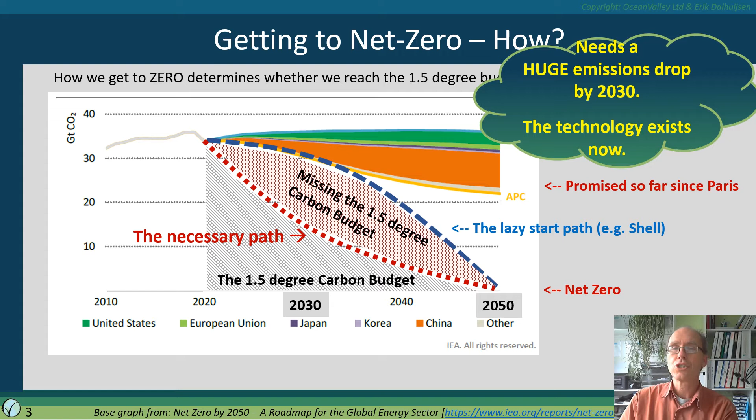On to the role of hydrogen. Hydrogen is an abundant element, a building block of water and the smallest, lightest atom in the universe. As a gas, it's not so abundant, and it does not turn to liquid until 250 degrees C below zero.

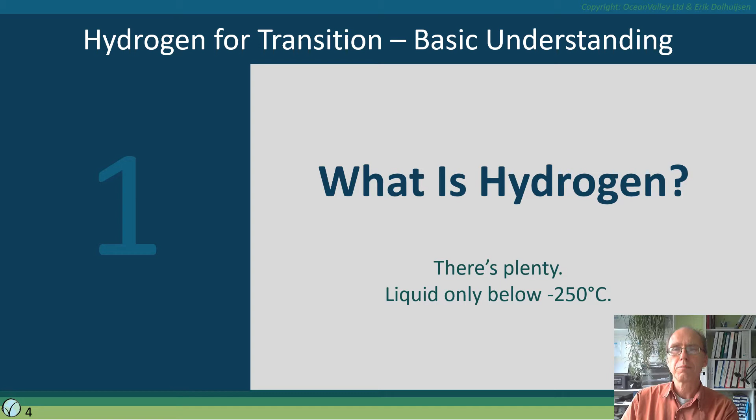In the context of net zero emissions and climate change response, hydrogen is an energy carrier, and only an energy carrier. It's only as clean as the energy you use to make it. It's clean to get energy out, whether by burning or with a fuel cell as electricity.

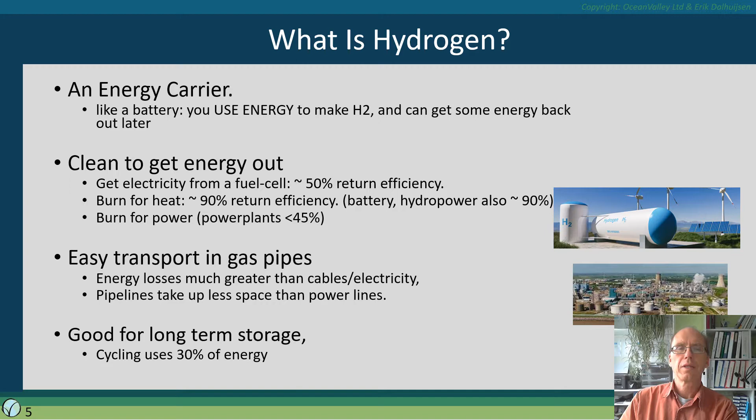It's easy to transport in gas pipelines, though this costs rather more energy than moving electricity. But the pipelines are smaller than equivalent power cables. And hydrogen is great for long-term storage, if you have a place for it. Cycling it into and out of a storage place costs about 30% of its energy content. Once again, it's only as clean as the energy used to make it.

The hydrogen economy is a term often used and is a misnomer. I quote the IEA's head of energy technology, Timur Gül: 'I think if you're aiming towards net zero emissions, you don't look for building a hydrogen economy. You look for a decarbonized energy sector.'

A little about efficiency, a subject often touched upon. For transport, in the future renewable energy world, a hydrogen car has 1/3 of the energy efficiency of an electric one. A synthetic fuel car about half of that again, so 1/6 of an electric battery vehicle.

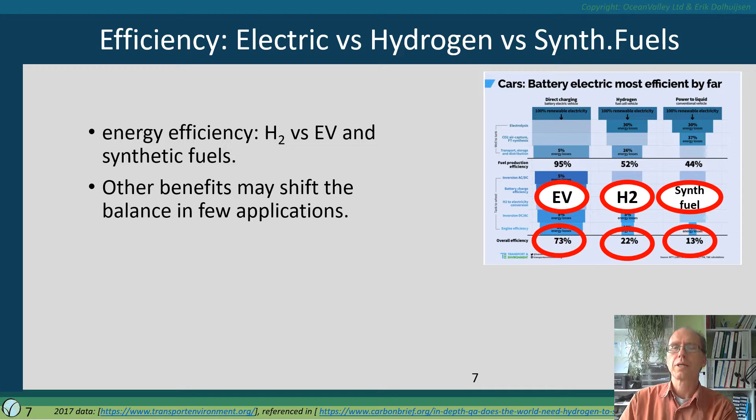For heating, even though hydrogen has great burning efficiency, it should of course not be compared with gas, but with the proper net zero alternative, an electric heat pump, which is 2.5 times more efficient than hydrogen.

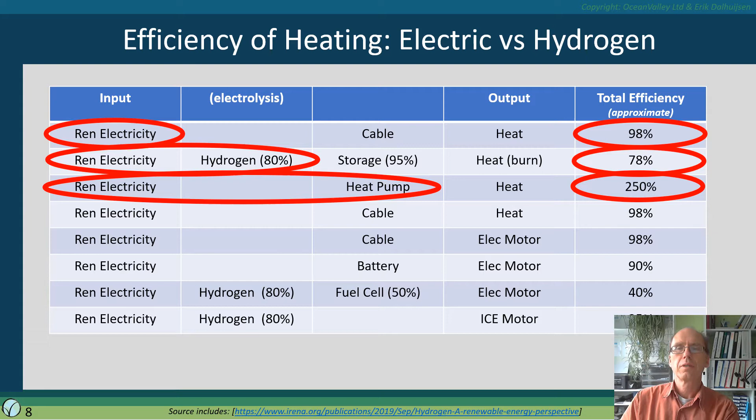So how much hydrogen are we using now? At the moment, globally, hydrogen uses 2% of the world's primary energy supply and 6% of the world's natural gas, and would use 8% if coal were replaced. This is before we start doing all sorts of nice new green things with hydrogen.

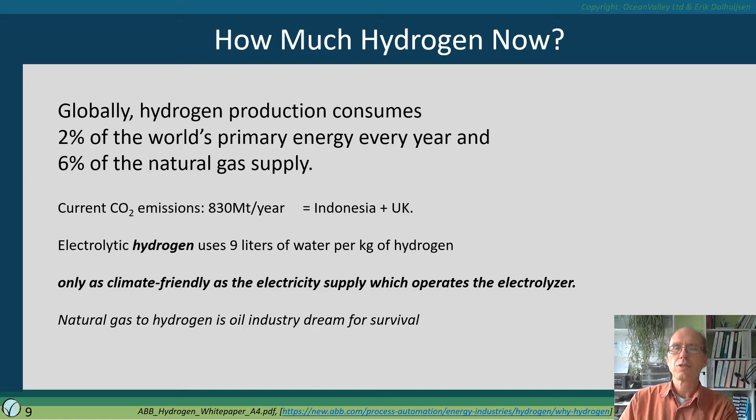At the moment, almost all hydrogen is made with fossil fuels, but there are better ways. There's only one hydrogen gas, but depending on how we got this gas, so what type of energy and what emissions were required to get the hydrogen, we differentiate types of hydrogen, each one named with a color. Many colors are used differently by different people, but we'll look at the main three, beginning with green.

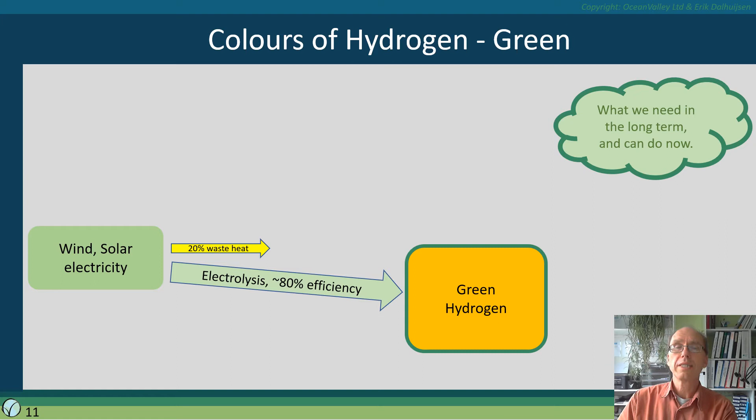Green hydrogen is made with renewable energy through a process called electrolysis, which is about 80% efficient, and there are no emissions produced from this process. Green is what everyone agrees we will need in the end, because it's the only sustainable variety.

Brown or grey hydrogen is made from oil or natural gas, usually by a steam reforming process during which CO2 is emitted to the atmosphere in the same amounts as if you were burning oil and gas.

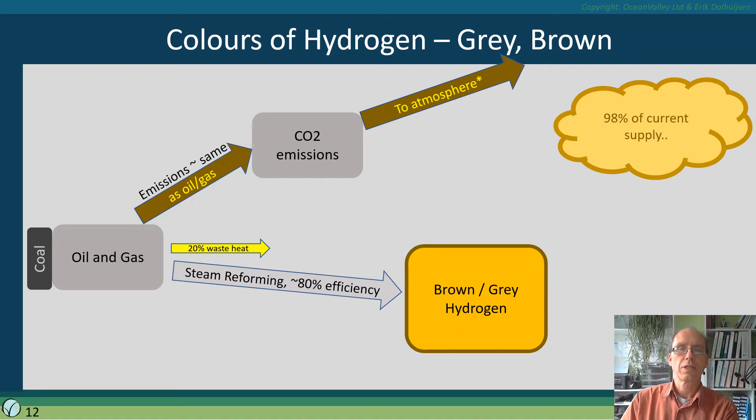So for the same energy content, grey hydrogen emits 20% more CO2 than natural gas. And if made from coal, these emissions are much greater still.

For blue hydrogen, we take brown hydrogen or grey hydrogen and then try to do something better with the CO2 emissions from this process rather than just letting them fly. We call this somewhat experimental process CCS or CCUS, carbon capture and storage. If it works well, it captures around 80% of the total emissions from the process. This captured CO2 is then stored underground, where we hope it stays for 10,000 years, because that's roughly how long it takes to mineralize and become harmless.

For now, two points to remember are: blue hydrogen is not net zero, and it's not a proven effective process anywhere near the required scale.

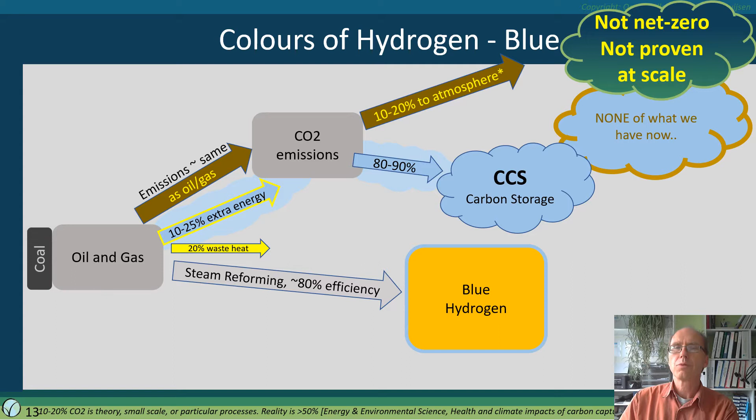Cost and price. We'll look at the comparable cost of hydrogen. The price of hydrogen will be determined by carbon pricing in the end. Considering there is no real blue hydrogen and still very little green hydrogen, this would seem a difficult question. Surprisingly, those in the know and in the business all seem to agree. Any concern about the cost of green hydrogen comes from misinformation and industry bias, not from analysis and understanding.

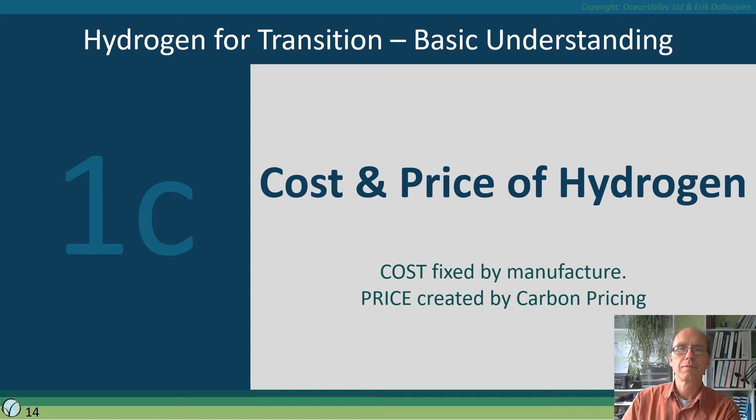The best estimate from IRENA, the well-respected renewable energy agency, is that by 2030 the cost of green hydrogen will be the same as or lower than the cost of grey and blue hydrogen, looking for example at Scottish wind power for production. Some of the big industries have explicit targets to make this cost parity happen. So already by 2030, green hydrogen will be the cheapest hydrogen around.

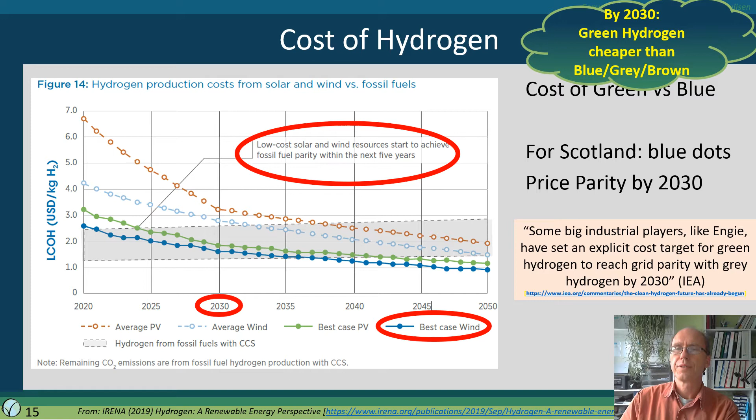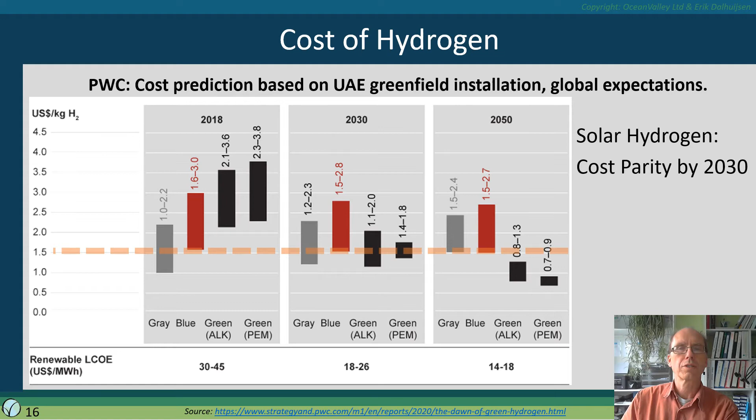A different take from PricewaterhouseCoopers, based on solar generation on the Arabian Peninsula in the UAE, also shows price parity by 2030 and an even lower cost by 2050. There are other cost pictures which imply a different story, the ones I've seen typically based on inadequate representation.

Hydrogen has one particularly important role to play in the new world of renewable energy, and I'll quickly explain why this is important.

Renewable energy systems are intermittent. They produce energy, mainly electricity, when sun, wind, waves, tides are around, but not at other times. This leads to a mismatch between energy supply and energy demand. For short-term daily cycles, there are multiple solutions, but for the long-term seasonal mismatch, hydrogen storage can play a big and important role.

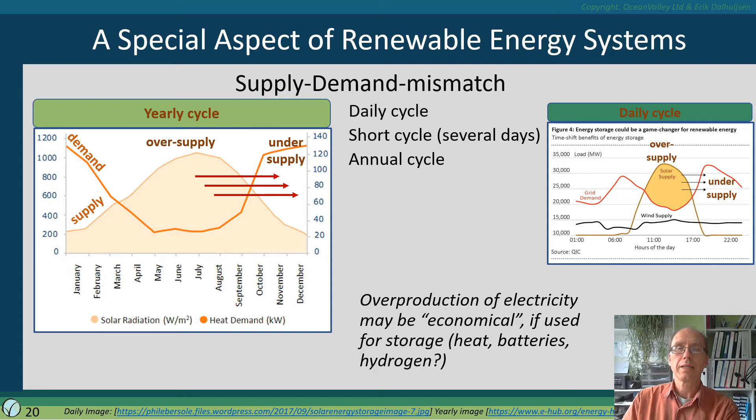Let's have a look at what the main uses and potential uses of hydrogen are. Currently, hydrogen is used mainly for industrial needs. Where it is used depends mainly on availability of storage and is typically used and turned into other products near where it's made. This means that where we choose to use hydrogen for the transition, it'll almost all be in addition to the current use.

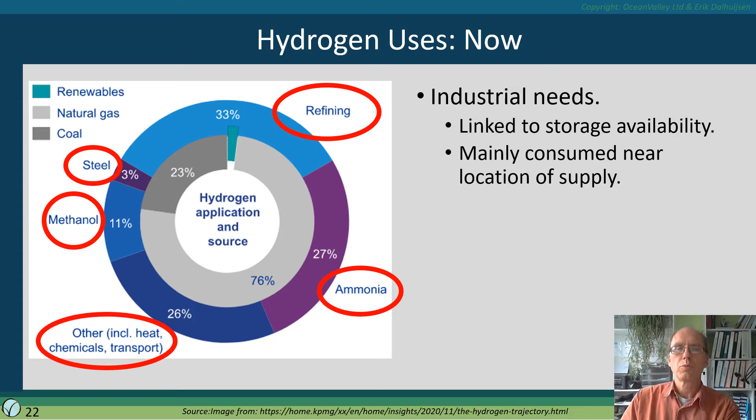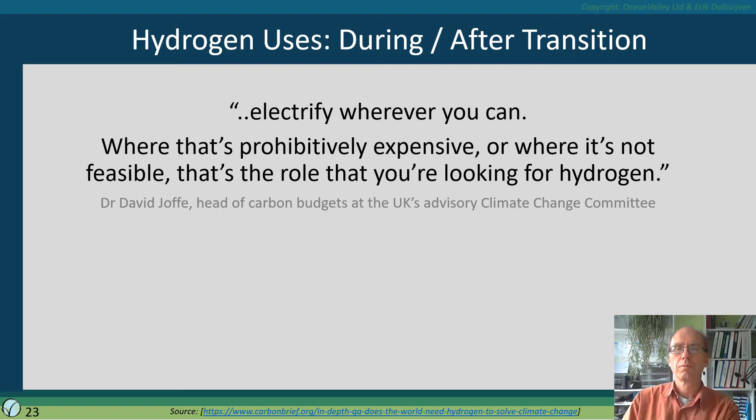And because we already need a lot of renewable power, this leads to the most important rule, and one on which there is general agreement. This is the need to electrify wherever possible. Only where that is prohibitively expensive or not feasible should hydrogen play a role. And of course, we need to reduce our energy need first.

During and after the transition, these are six of the important areas of potential use being discussed. Seasonal storage? Yes, this is an important role for hydrogen to play. It could well be that storage in old natural gas fields is a way to go. Renewable energy grid stability? Yes, by both using excess energy when the sun shines and the wind blows to make hydrogen and store it, and by turning hydrogen back into power when there's no sun or no wind.

Industrial application, where electricity is insufficient? Yes, though more and more technologies are around which allow direct electricity to be used in industrial processes. Industrial chemicals? Yes, for some products like ammonia this will be required. In areas like plastics, maybe revisiting the real need could also prove to be a powerful tool.

Transport? For shipping, green hydrogen as well as ammonia or methanol derived from it are likely fuels of the future. For road and rail transport, the applications for hydrogen are specific and limited, as I discuss in the next section.

Heating? Unlikely. Even though burning hydrogen in domestic boilers is being suggested as an easy drop-in solution, it's highly inefficient when compared not with gas but with alternatives such as electric heat pumps on renewable energy. Burning hydrogen, other than as a niche solution, can slow down or even derail a timely transition.

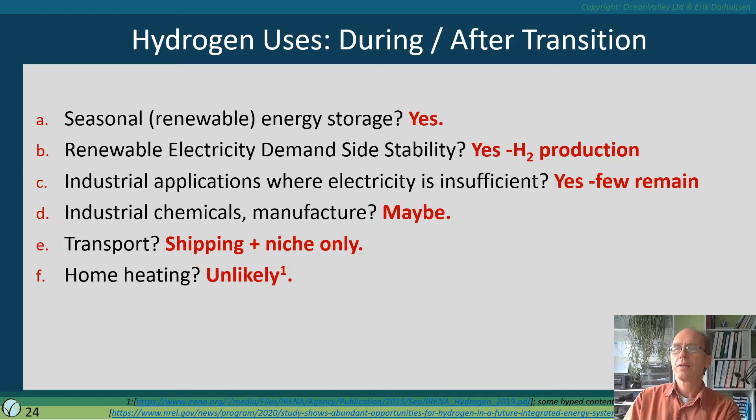There is unnecessary confusion over the role of hydrogen in transport, but first we'll cover some basic ground rules. The goal in decarbonising, the first line of approach, is to minimise energy use. Just converting the things we have to a different fuel is not enough.

We ended up with our system through the market economy. Markets are often described as efficient, but that's an entirely different context of efficiency. The market economy maximizes consumer expense and externalities because this maximizes business profits and growth. An efficient market economy maximizes individual financial gain at the expense of society as a whole.

It's good to take a step back and look at current actual needs and desires, and keep an eye on some of those unwanted consequences of the current system. With transport, we must work towards changing the modes we use. This will reduce emissions, energy consumption and cost, while improving our quality of life.

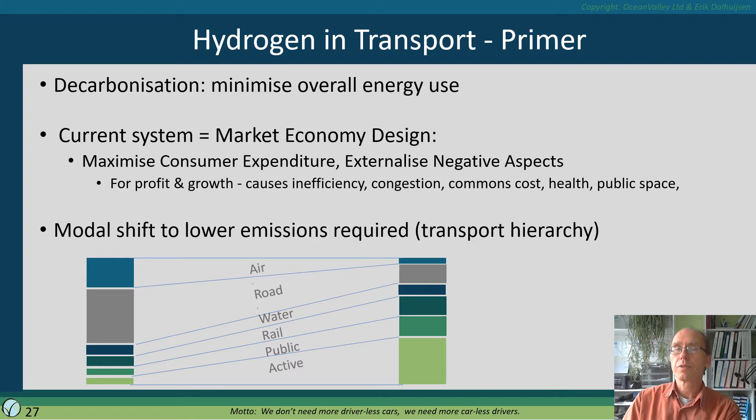Not all green transport modes are cheaper, but the unequal impact in different markets is a critical part of the problem. We could actually ship wheat today with zero emissions from Argentina to Europe, and the price of bread in Europe will increase by less than half a cent. That causes little concern. However, the cost of shipping will increase threefold, and this causes a big problem for the shipper. The cost of polluting must be charged such that cheap shipping is over and clean shipping becomes the norm.

A lot of modern-day air transport is heavily marketed, but of little value. Up to a medium range of around 1,500 kilometers, high-speed rail travel can be cleaner, cheaper, and quicker. For unavoidable long-range flights, the jury is out. With more high-speed rail, fewer flights overall are needed. The path to decarbonize air travel is by a modal shift to rail, reducing the number of flights. Then remaining flights must be cleaned up.

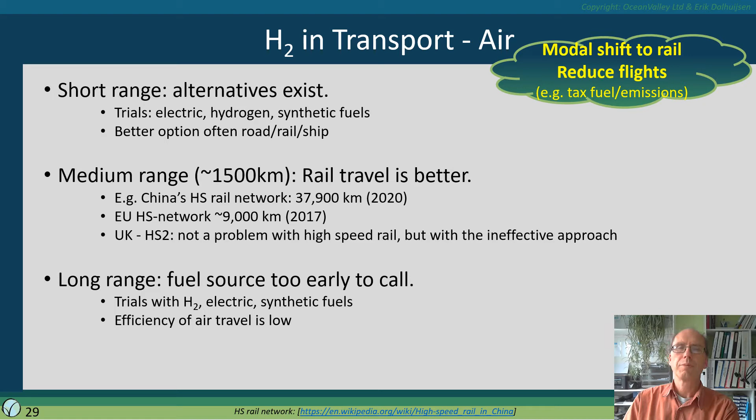Shipping fleets have a lifespan of around 25 years. Therefore, to get to net zero by 2050, all new ships must be decarbonized from now onwards. The choice of decarbonization method is one of storage and availability, efficiency and practicality. In Scotland, for example, green electricity and hydrogen could be made available almost anywhere.

For coastal shipping and ferries, battery and hydrogen seems to be the primary energy carriers. For smaller ferries, the break-even time for a battery vessel compared with diesel is shown to be only around 5 years. Larger and small hydrogen vessels are also under construction, and some flexibility may be built in as electric drive is used by both.

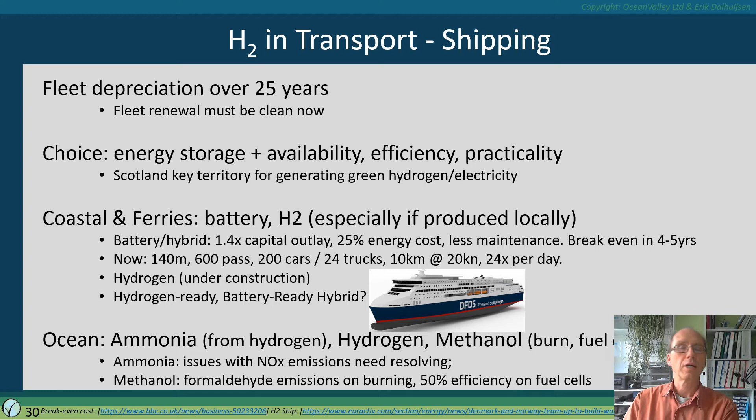For ocean-going shipping, several fuels are being pursued, but ammonia, hopefully made from green hydrogen, is a likely candidate. Fleet renewals must be made low emissions, through carbon tax or otherwise.

That means there's no excuse to not pull out all the stops and go full on for track electrification, replacement of diesel locomotives, and taking on more freight and passengers from the road network. So there is a need to massively increase the speed of track electrification, train electrification, a modal shift from road to rail, and the construction of some niche rail hydrogen infrastructure.

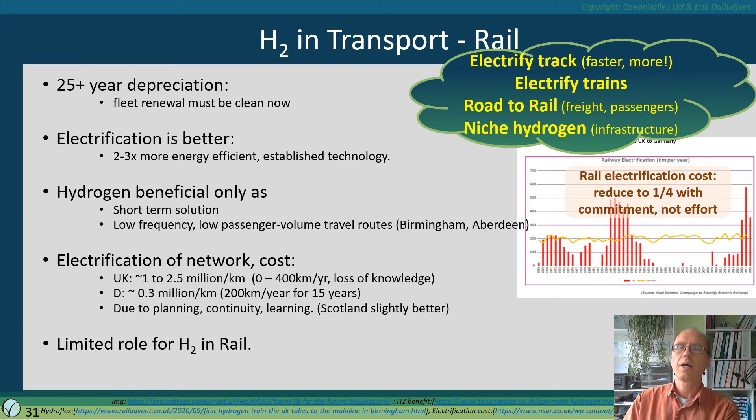Road fleet depreciation is around 10 years, so ensuring new vehicle fleets are zero emissions now will help us towards the challenging 2030 decarbonization goal. Due to the energy inefficiency of hydrogen, electric vehicles are better for light and short medium distance transport. These fleets often have the option of overnight charging, which helps. Also, for heavy so-called last mile transport, electric is often the best choice and already available up to 24 tons.

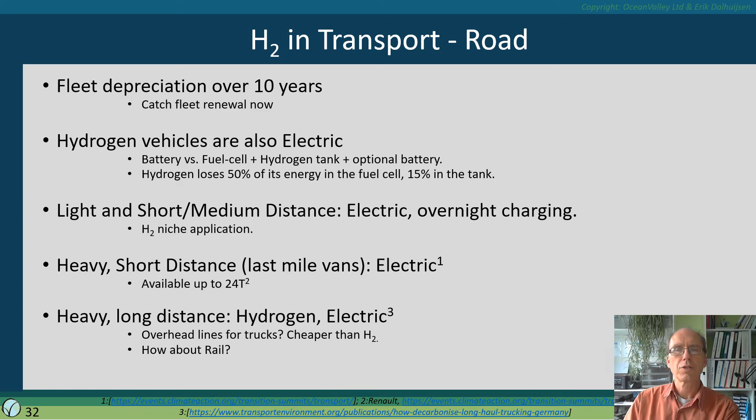For long distance, both hydrogen and electric are likely players, and so both infrastructures must be massively built. Overhead electric lines for lorries may even be an option. So we need to build the infrastructure, make all fleet renewals emissions free, and work on a modal shift from road to rail.

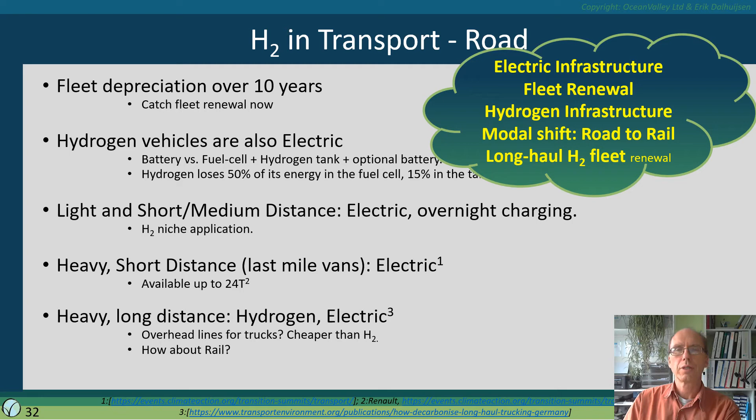Much discussion and many decisions relating to the energy transition seem surprisingly short-sighted, ineffective and incorrect. It's worth looking quickly at some of the issues at play to see where this comes from. Many analyses would fail under basic scientific scrutiny, but little of that is applied. Here are a few pointers of misguided drivers used in many published pieces.

Decarbonizing is complex, but not nearly as complex as some want you to believe. Comparisons show a timeline, but fail to adjust underlying parameter uncertainty in the same timeline. Forecasting is a skill, it's not an opinion.

Carbon pricing: typically, comparisons fail to take reasonable future carbon pricing into account, which must be punitive towards emissions. Incorrect comparison, for example, falsely assuming like for like as the expected future case. Ignoring opportunity cost: there's only one amount of money to be invested. Where is this best invested? For example, direct capture typically fails on this criterion.

The assumption that people do or don't want something without the relevant context. The suggestion that it's too expensive, without clarity on who this expense is for. Is it for that particular industry or for everyone, and in which context?

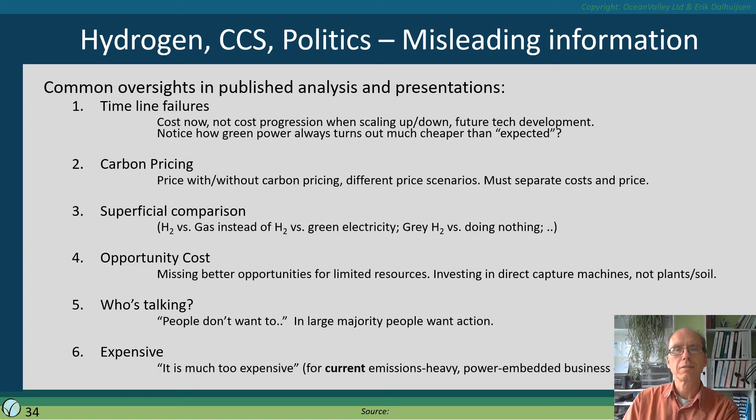Aberdeen is a specifically oil-biased place and has been resisting industry transition for more than a decade. Its hydrogen strategy is a good example, and while a hydrogen strategy is an excellent idea on its own, the Aberdeen flavour reeks of petroleum and looks to embed oil emissions for decades to come, while delaying the long overdue decommissioning of this polluting industry.

The hydrogen strategy of Aberdeen suggests that hydrogen is essential, progressive and clean, while the core of the strategy is based on ineffective hydrogen applications, a reliance on fossil-based hydrogen, and the long-term embedding of petroleum energy industry and infrastructure. Read the detail of the slide at your leisure later.

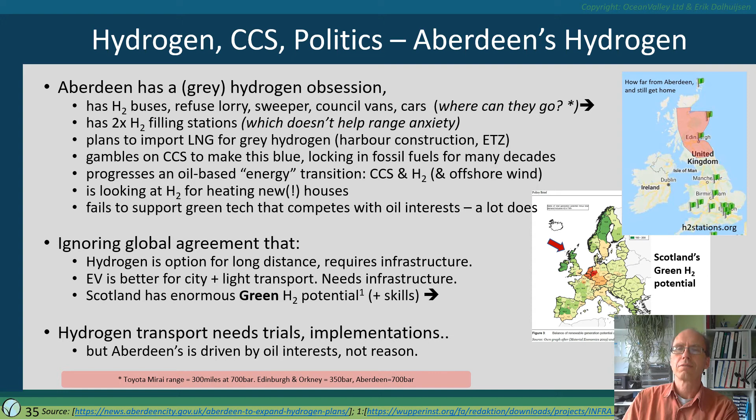The acute interest in hydrogen stems from the realizations of oil industry management that change and decline are coming. After successfully resisting climate action for decades, a transition momentum is building. The remaining areas for growth for the industry are single-use plastics and grey hydrogen.

So to counter the threat of green hydrogen, so much effort goes into co-selling grey hydrogen together with unproven CCS as blue hydrogen. This ignores the fact that green hydrogen can be made available sooner, cheaper, and better than blue, real net zero. The only real problem with green hydrogen is it's not made from fossil fuels.

This does not mean there is no legitimate interest in CCS. Rather, the problem is, let's not waste CCS on the fabrication of hydrogen where much better alternatives exist.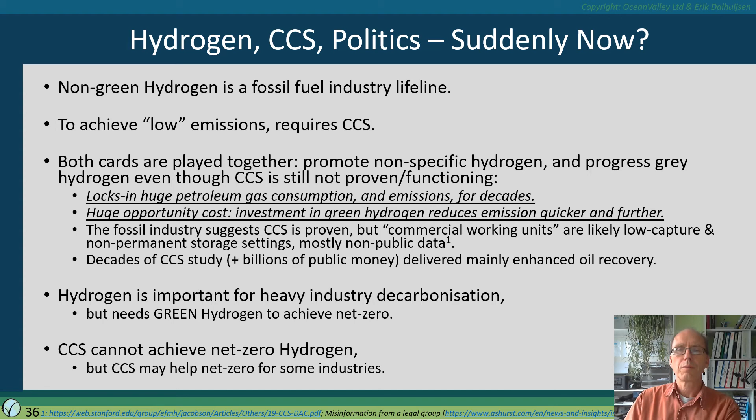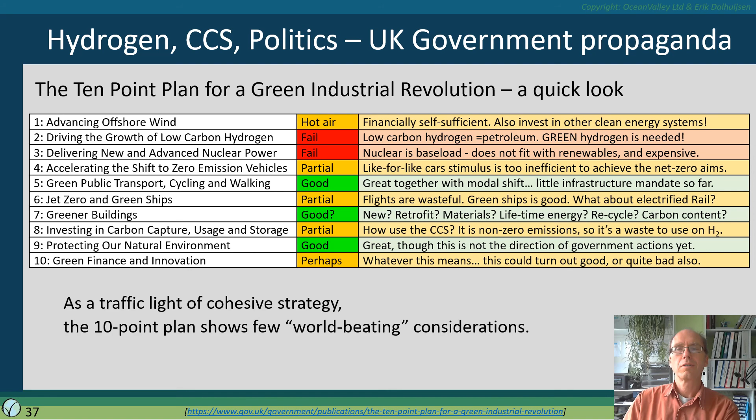In conclusion, the path ahead is narrow, but the direction is clear. The non-fossil fuel industry is aware, has the technologies necessary, and is waiting for the starting gun from governments, whether in the form of carbon tax, a coherent plan, incentives, or market demand. This probably works best globally, but doesn't have to.

So let's maximize renewable energy production. We'll need all of it. Then reduce energy use, maximize the modal shifts, and electrify wherever we can. And finally, green hydrogen is the only hydrogen for net zero, and we need quite a lot of it.

Please share this understanding and let's finally help this transition happen.